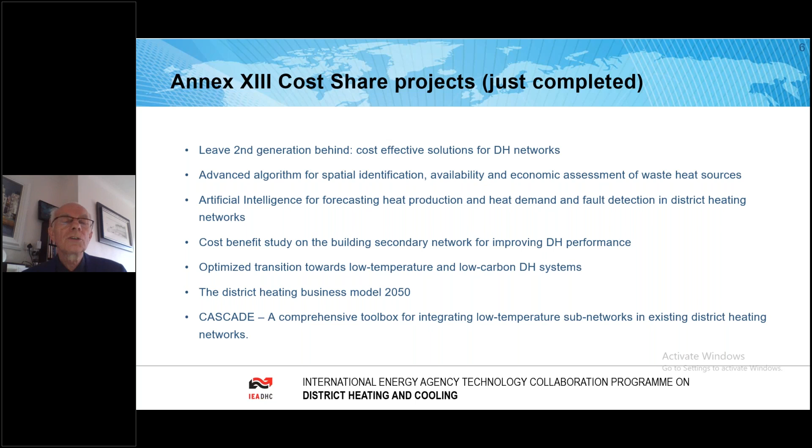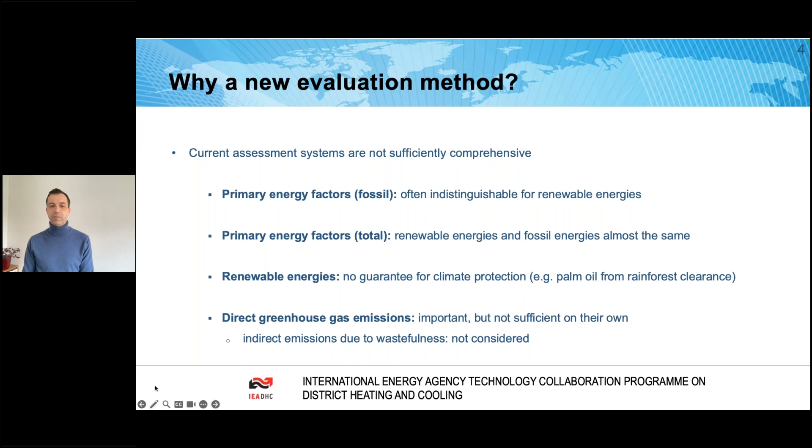I asked the organizers to include the word exergy in the title. I know it's a bit confusing, maybe a bit unsettling, so I hope I can explain it in a simple way. So what is exergy? Everything starts with energy that you should be familiar with, but energy is not the same as energy. It has different forms, power, heat. And if that is considered, one can say energy has a certain quality. And the product of energy and energy quality can be considered exergy.

So what is now this energy quality? So if you look at an energy flow and its potential together with the environment to produce electrical power, that's essentially the energy quality. So if you can convert 100% of the energy you're looking at into electricity, then it's 100%: electricity, mechanical work, or even fuels, because it's an ideal value. So if the machine were perfect, what is the physical potential of it? With heat, even with an ideal machine, it depends very much on temperature, how much electricity could be generated.

And that leads to a couple of insights. For example, energy is only converted, exergy is consumed. So when people are talking about energy consumption, it's physically not totally correct, because energy is just transformed from one form to another. Easily seen in gas boilers, you put in fuel energy, it becomes high temperature or moderate temperature heat, and then it becomes ambient heat once it leaves the building through the envelope. Exergy is the product of energy and energy quality, and it can be understood as valuable energy. So power equivalent, but let's say just valuable energy.

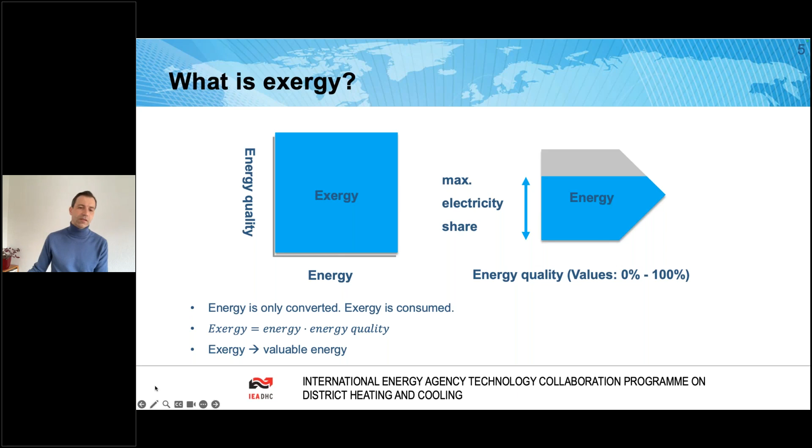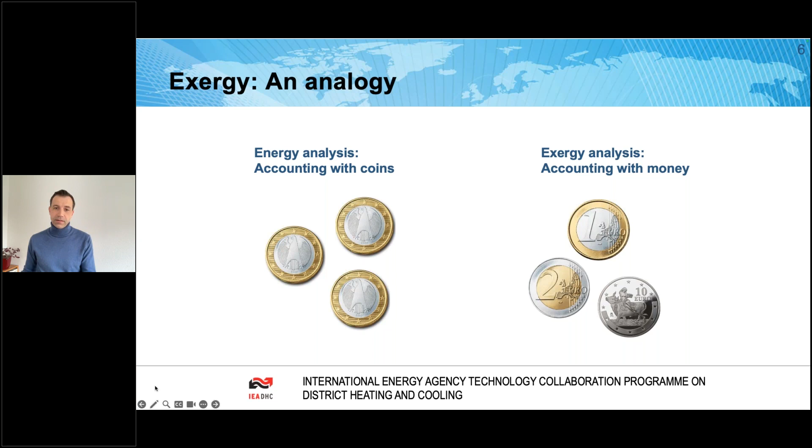An analogy can maybe illustrate this a bit further. So energy analysis is like accounting with coins. So 1 kilowatt hour equals 1 kilowatt hour, whether it's gas, whether it's power, whether it's heat, it's all 1 kilowatt hour. And it seems to be all the same. As I said, the energy quality is not considered, and accounting with coins is also not very helpful when doing bookkeeping. So exergy analysis is kind of the upgrade, accounting with money. So now there is a value printed on these coins that is also considered in the accounting. A high value energy is traded for many more coins of low value energy, and that then can be considered a fair trade.

From the definition of exergy, a bit of expansion: resource exergy. So what are resources? Energy and raw materials from the environment. They can be measured in exergy. Why is this important? Because sometimes balance boundaries are set in a not very helpful way. And why resources? Because resources are storable. That means if we don't use them today, we can use them tomorrow. Therefore, being frugal with them makes sense.

Solar energy, on the other hand, is fluctuating. Therefore, while it makes total sense to make the most out of the solar energy, for cross-technology comparison it cannot be the primary energy or the resource, because otherwise we would have to consider the solar energy that went into biomass or into natural gas or into other fossil fuels as the primary energy if we wanted to do a fair comparison. To avoid that kind of, let's say, ambitious project,

the approach to resources was taken, so it's an energy form that is directly storable in the form you are looking at. That means for solar, PV panels produce the storable resource electricity. Solar thermal produces the storable resource high temperature heat, and that is essentially the input in the system and in the comparison. So this resource exergy analysis is a method that considers exergy and sets consistent balance boundaries. It integrates energy and energy quality. That means the first and second law of thermodynamics, and it considers only directly storable energy flows as resources.

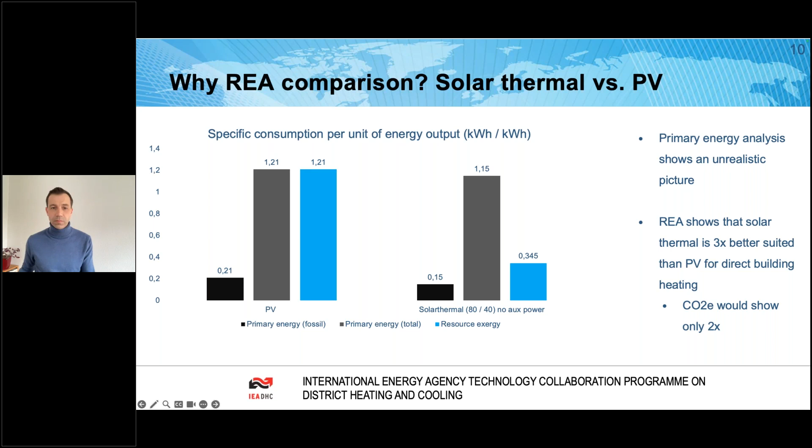One can argue CO2 emissions would also show a difference, but they are very small anyway. So if any savings are calculated, the savings by employing either PV or solar thermal in terms of CO2 are almost 100% in both cases. And also we would miss the impact on indirect emissions just going for CO2 emissions. Primary energy analysis, on the other hand, shows an unrealistic picture, as we've seen, since it doesn't consider energy quality.

So how can resource exergy analysis support solar thermal networks? It supports the argumentation for such networks by quantifying their advantages comprehensively, showing that these networks already provide a green and resource-saving solution that cannot be provided by any type of electrification that uses the grid mix until it's completely carbon free. And when that is happening, we don't know, especially in winter during heating season.

It helps to consider the solar thermal networks in comparison with other solutions, district heating solutions and other individual solutions, and it allows a quality control of analysis results. As I already said, they can be quite wrong without anybody noticing, because nothing breaks down if somebody comes up with a misleading CO2 number or primary energy analysis result. So it helps to mitigate the risk of greenwashing and costly mistakes.

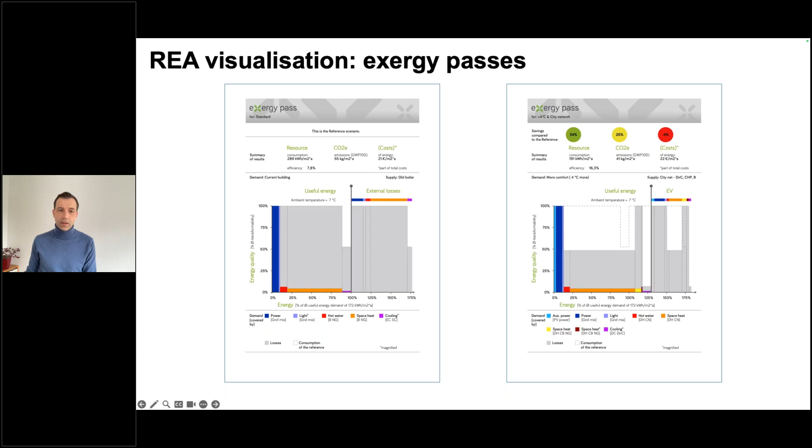And what can authorities do? Well, they can inform their technical staff of the calculation guideline that AGFW, the program manager, put forward, that contains all explanations, equations, and LCA data. You can get accustomed to resource exergy as a key metric for savings and efficiency. Require such calculations for transformation plans, at least as a quality check,

because, as I said, it can be easily wrong without anybody noticing, especially when heating and cooling are included, especially when solar is included, because for solar thermal, there's also one issue with the LCA analysis, that the solar energy is considered primary energy, while it cannot be saved by not using it. So I think that might be a problem that resource exergy analysis can also solve. If you're interested in this methodology, contact me for more information on how to apply it most easily.

I'd also like to end with a small metaphor. Heat transformation plans without scientific validation are like a car without official approval. You can't rely on them. And since countries and municipalities place a lot of money based on these plans, I think it's worth doing a double check, ideally doing something like resource exergy analysis.

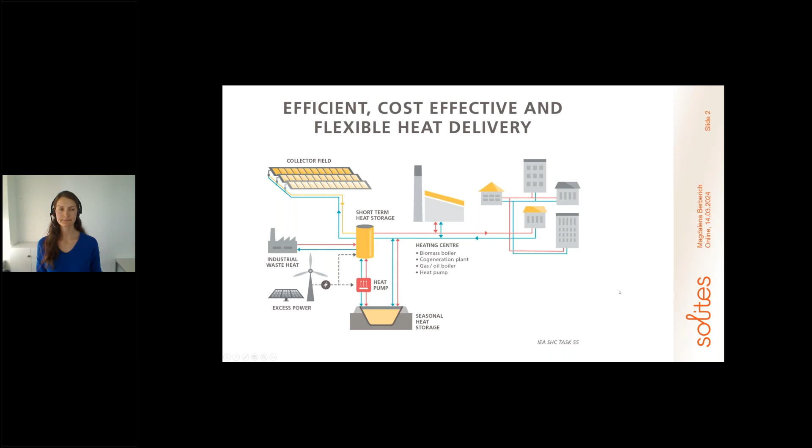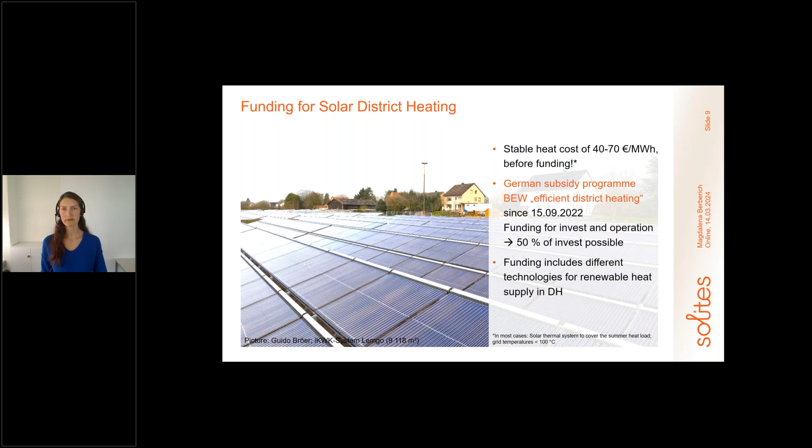We see that there is a good development in the market, but there were some stops or not so much development in 2021, for example, because for 2 years there was the waiting for the new funding scheme BEW. It was said that it would come, but then it needed more time, so the market was waiting, and the investors, of course, waited and said, no, I will not invest now, I will wait for the good funding opportunities. And so the plants which were thought about in 2021 were just installed in 2022 and 2023.

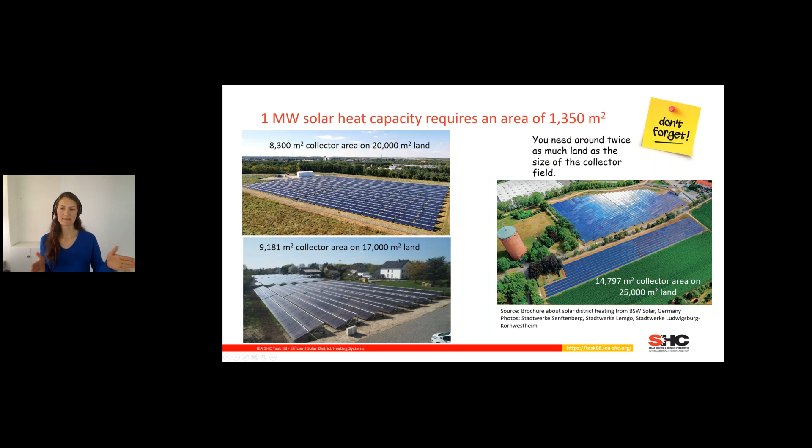Finding areas near the heat demand is very important and a big task in the project development, and it's often a long process. What is important for this? The communication between utilities, investors, and the local authorities. A structured analysis of possible areas, and it's better to find more areas than fewer, so you can maybe use them for another future project.

There are some synergies for the areas. Like here in the examples, you can have good ecology on the areas. There are new plants growing, and the biodiversity will be good on your area. And here, for example, on the right side, you see sheep on this area, so this is also a possibility.

One example as a best practice, for almost fossil-free district heating with 95%. It's a system which is in the real planning process now, and it's very special because here a big heat storage is built in an earth landfill, so you can store the solar heat seasonally and provide it very efficiently to the houses. It's a new building area, and with the solar thermal, the heat storage, and shallow geothermal, 95% fossil-free district heating is possible.

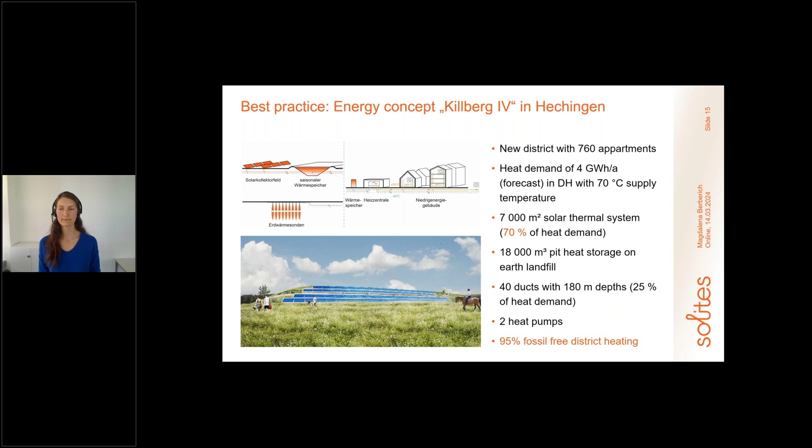Another plant which is just installed and will soon be in operation is in Sondershausen. It's 6,000 square meters of collector area, and it's a new product: high vacuum flat plate collectors. It's very efficient because these high vacuum flat plate collectors can produce temperatures of more than 100 degrees. And this is not necessary here.

It's normal district heating, but there are a lot of cities in Germany with district heating of more than 100 degrees. This is something we analyze in the IEA SHC Task 68 to find solutions. How is it possible to include solar thermal in these district heating networks with higher temperatures in an efficient way?

If you want to have more information, I can recommend our newsletter or our website. And here are also two other sources in English from IEA SHC Task 68, an info package for cities and towns, and a brochure of solar heat for cities.

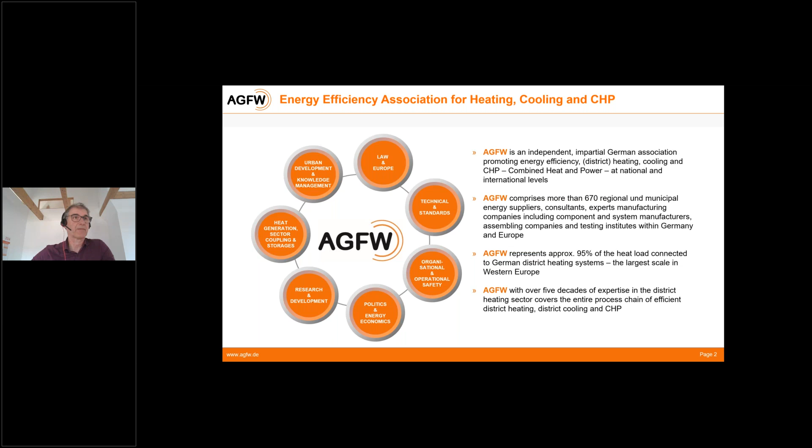My role is that I'm in the R&D sector at AGFW, but I'm also representing AGFW in the state of Baden-Württemberg, and I'm also leading IEA DHC Task Shared 5 about the integration of renewables into district heating and cooling networks. So I included this slide, which is about the activity of AGFW in the field of solar district heating, because I think it's good for you to see we have been active here since 2009 in more than 10 national and international market introduction projects. So the topic is absolutely not new. We consider solar district heating really as a mature technology ready to use. We also collaborate with all the suppliers of these sectors, and we have various services for our members. For example, we have one document on how to make tenders for solar district heating plants. We are offering courses, and we have guidelines on how to implement these plants, and we are also a partner in the project Magdalena mentioned before.

So what about the new role of district heating in Germany? I wrote here the headline: never before has district heating had such a high significance in Germany, and I really think this is the case. We have a government which is really focusing on the heat sector in this legislative period. So there's a lot of policy, and in this transition of the heating sector, there are two pillar technologies. One is district heating and cooling, which means centralized heat supply. And the other pillar is heat pumps for decentralized solutions.

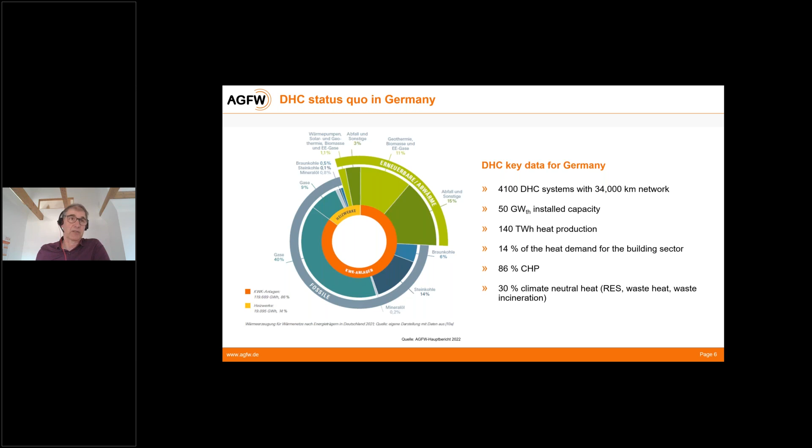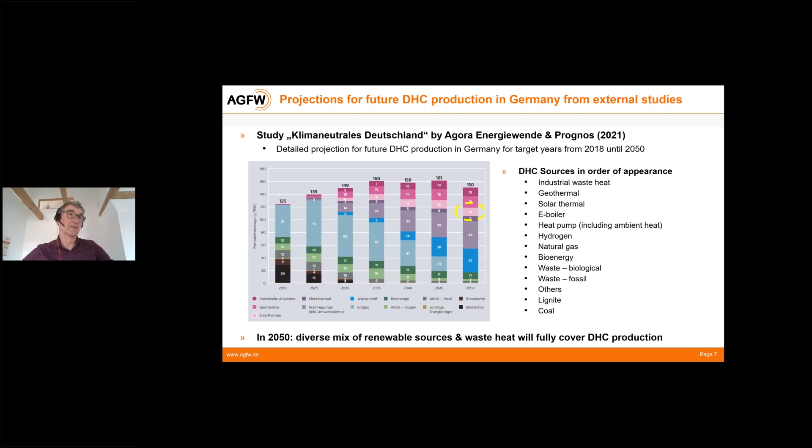So the roof is, of course, the Climate Protection Act with climate neutrality in 2045, then driven by the Energy Efficiency Directive of the EU. We have the Heat Planning Act, addressing cities and municipalities so that they do heat planning. Magdalena also described this already. So heat plans have to be prepared.

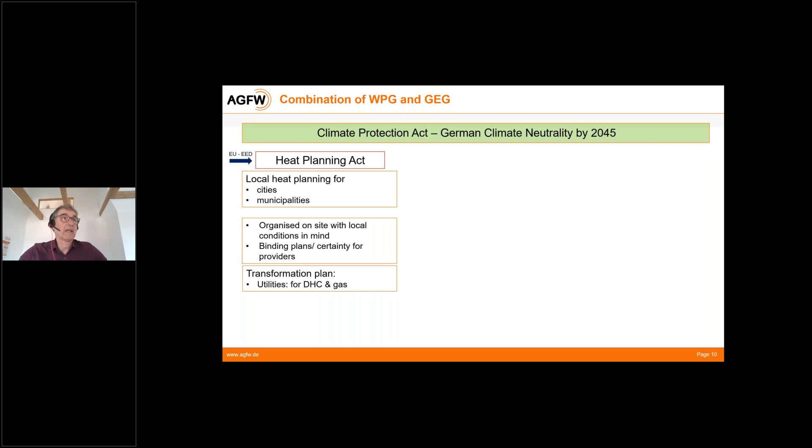And this was then combined with the Building Energy Act. There, the addressees are the building owners. They have requirements that they have to change to 65% renewable energies. And the important point there is that one possible option to fulfill the building energy requirements will be district heating and

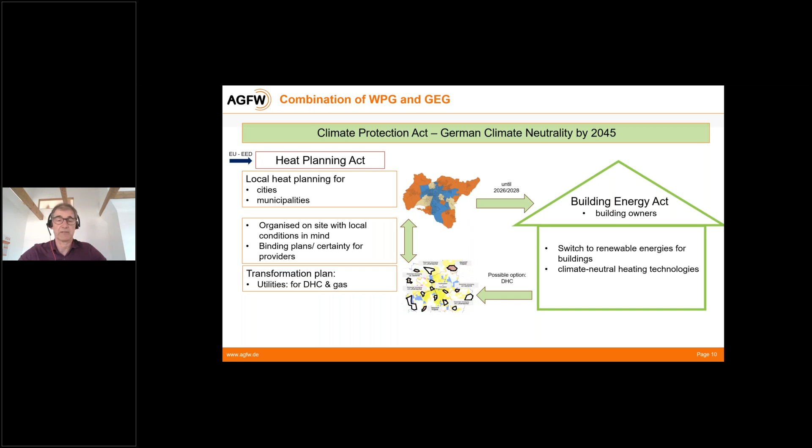cooling. So if you connect to district heating and cooling, or district heating and cooling is developed in your area, and this is, let's say, with a commitment, then you're fine with all the building requirements. And this, of course, gives quite a push to the sector. And this was then underpinned with funding programs, both for district heating operators and building owners.

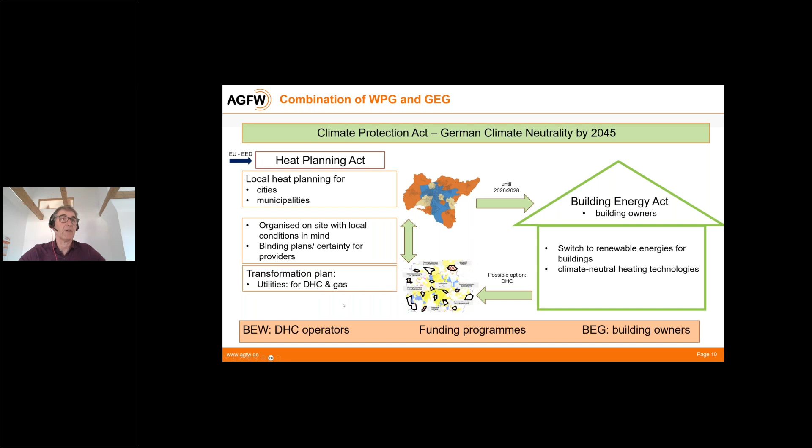And the one for operators is called BEW, which is Bundesförderung effiziente Wärmenetze. This was published in 2022, and it was really a game changer because the enterprises have been ready to invest. There are 4 billion euro for 2022 to 2026. It seems a lot, but investments are big, and we hope that it will be sufficient. We also see that in this 1.5 years, already 1,300 applications have been made, and around 700 million euro have been approved.

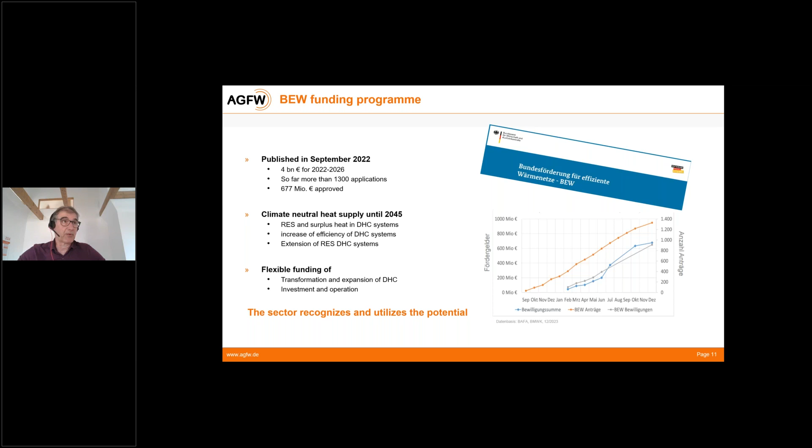The good thing is that it's really a holistic program, financing measures in the district heating network, also extension of district heating networks, but also change of the production capacity to renewables. And just shortly to show you how this works, it's subdivided into 4 modules.

The basic idea is, as a district heating supplier, you have to first make a plan and a clear picture of how you want to decarbonize until 2045. So you have to paint the final picture, and you also have to show your roadmap to this final stage. And then you can take the first slice and plan it in detail. Such a slice is 4 years, and then you make an application to get financing for that.

This transformation plan is financed in module 1, and module 2 is then the first slice of 4 years. Then you can invest and build, and at the end of this 4-year period, you can already go to the next step, prepare the next slice, make the next application and come to the next investment period. And then there's also module 4 giving operational cost subsidies, and the basic idea is to make renewable district heating and cooling as economical as CHP, combined heat and power, was so far.

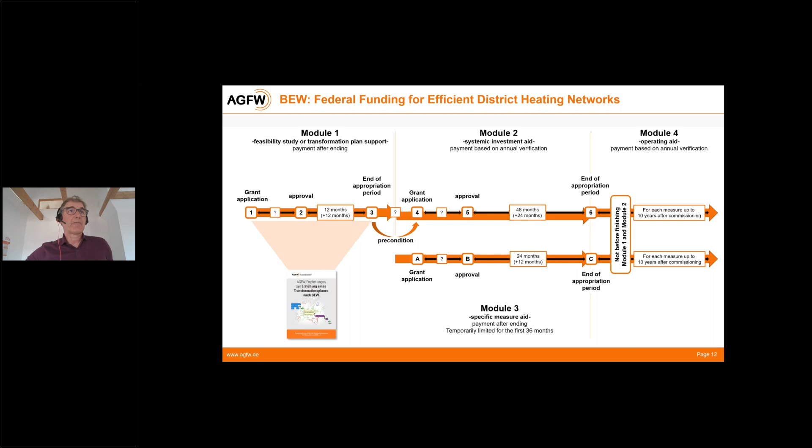Okay, and we have quite nice lighthouse projects coming up with all these initiatives. Just last year we had the first river heat pump with 20 megawatt in Mannheim. There's another one in Stuttgart. In Cologne, it's a 150 megawatt plant. We have the biggest solar thermal plant in planning in Leipzig with 46 megawatt, and other plants coming up. And it's nice that the branch is recognizing that and really taking this opportunity, planning and doing investments.

So just in brief, from our viewpoint, what are the challenges and opportunities for solar thermal? Of course, there's competition also between renewables. The real competition is, of course, fossils, but anyhow, the enterprises make their choices. And how do they make their choices? They look at the various technologies and how they fit in the complete final picture and the roadmap. They look at ecology aspects, economics, and security of supply.

The environmental aspects of solar thermal have always been perfect and really convincing. Luckily, economics are also no problem anymore, because competing with other renewable solutions, solar thermal is doing quite well, especially with this funding program. A bit challenging is still the security of supply, because we have a quite volatile heat source.

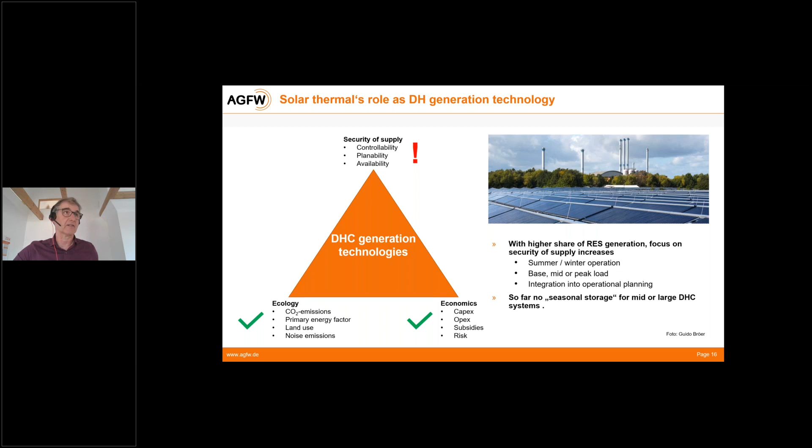Temperatures of networks are, especially in the larger networks, still high. They can be 110, 120 degrees as supply temperatures. Reducing to 90, 95 degrees is possible, but it's quite an effort. It's not simple. Luckily, solar thermal can work at these temperatures. The collectors are ready to deliver at the summer temperatures of the networks. That's not a problem.

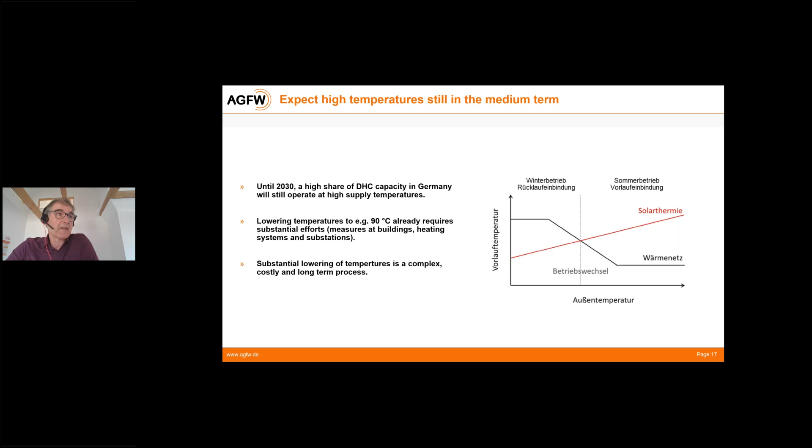We also promote really checking how we can integrate solar thermal in outer areas, remote network areas. Just imagine if you go to the really central places of the district heating networks where the power plants are, you have high pressures, high temperatures.

If you go a bit out to remote areas, there you find more areas where you can put solar collectors, and the conditions are much better for solar thermal. And even from a hydraulic point of view, it's quite good, if you have, for example, an extension in an outer area, to look at these parts.

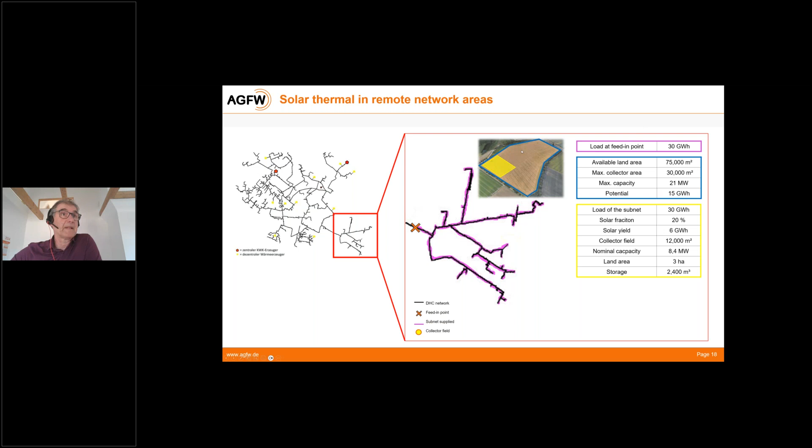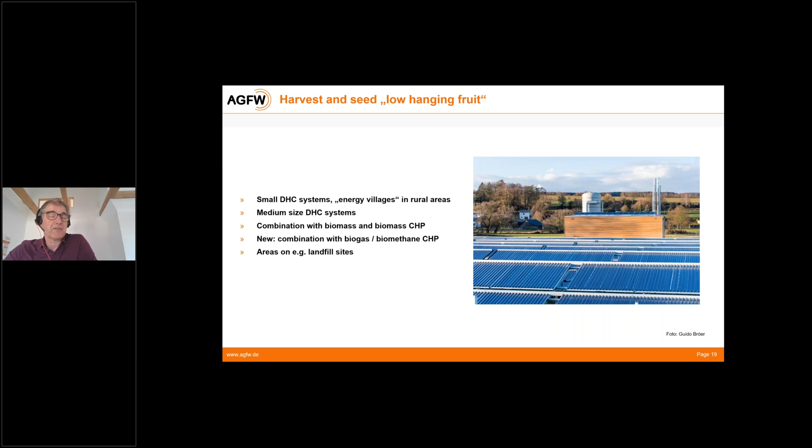We think there are really convincing low-hanging fruit, like the combination with biomass. Also the combination with biogas and biomethane is working quite well at the moment, because biomethane producers don't want to burn the biomethane anymore. They want to feed it into the gas network, because this is paid very well. So we should continue to harvest this low-hanging fruit.

And last but not least, areas are still a topic, not only for solar thermal, but for future district heating in general. We need areas for putting heating centrals close to, let's say, not urban centers, but close to the living areas. And still, I think authorization procedures are not yet sufficiently short. There is still some work to be done in these fields, even after all the efforts which have been made in the last years.

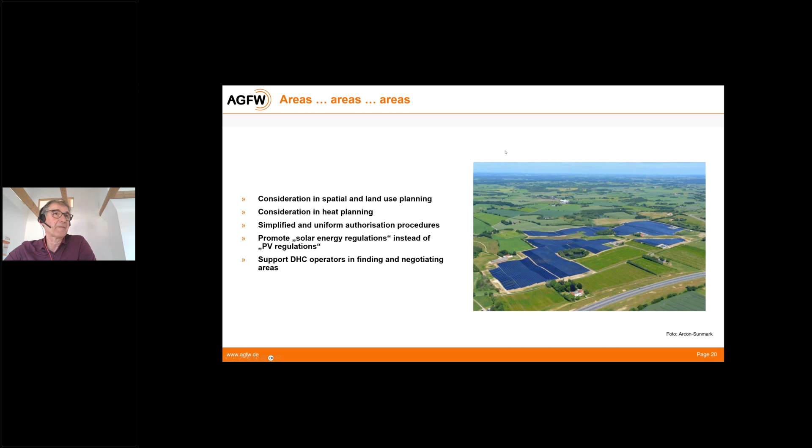So I come to my conclusions. We see at the moment that this transformation of district heating and cooling is very dynamic, but it's a long-term process, it has quite some challenges, and it has high cost. There's no doubt about that. It has to be financed. So solar district heating will be one promising technology in that, and has to adapt to these requirements of DHC transformation. And we have to really work on the regulatory obstacles to solve them urgently and as soon as possible.

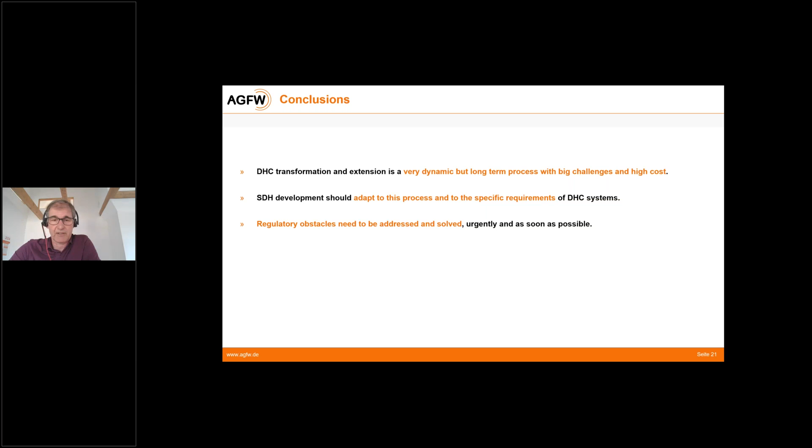In the present situation, we already see quite a demand for solar district heating. In all these transformation plans which are made at the moment, we very often see solar district heating plans. That's quite nice. Many doors are open now, and we have to find pragmatic solutions and be fast in the development. Thanks for your attention, and I'm ready for your questions.

Thank you, Thomas. Very useful, very informative. Thank you very much. I'm also feeling slightly nostalgic for my days in Germany, seeing all those beautiful pictures of Germany in the sunshine. So thanks for that. Gets us out of the grey early spring days.